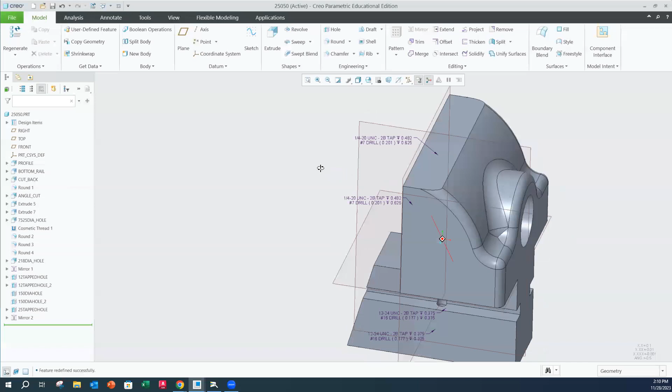Okay, let's go in. I call this the profile and I'm going to look at this extrusion. Here is what I came up with based on the dimensions that are there. After I got that all set, I'm going to show you how I extruded it, but I did it symmetrically about that front plane, on either side. So there's going to be an axis of symmetry down the center of this part.

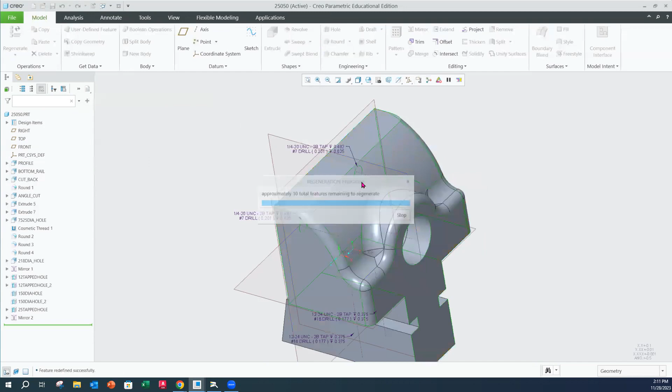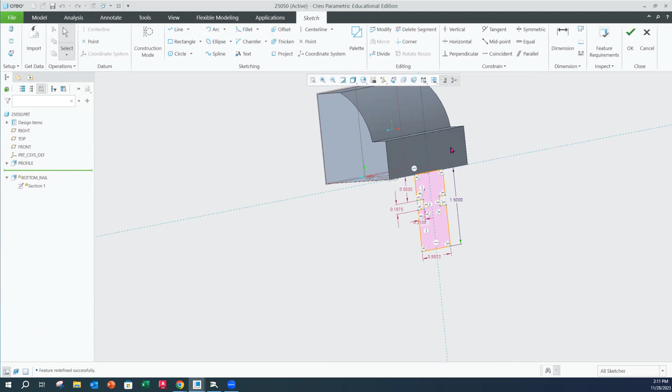Then what I did is I did the bottom rail next. When I talk about the bottom rail, that's this portion down here. So if I look there, my sketch came from the front side here. Now, when I look, it's actually on this surface right here of my original profile, that first extrusion that I created, and it's on this front plane right here.

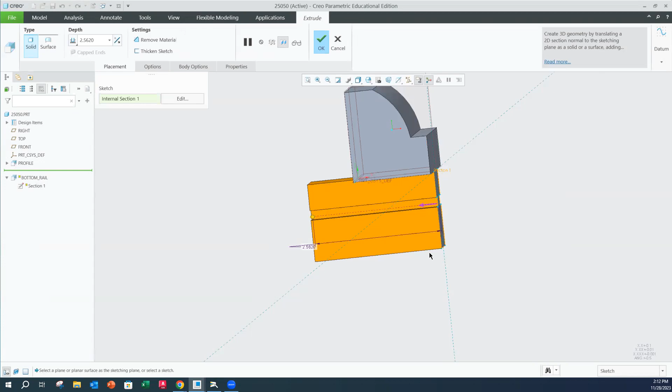And then I extruded this straight back. So if I go to definition there, I made it completely solid all the way back for the entire length of 2.562 inches, as given in the bottom dimension of that rail. Then I went in and I did a cut. The cut was taking out this portion right here. So if I look, I'm gonna grab this.

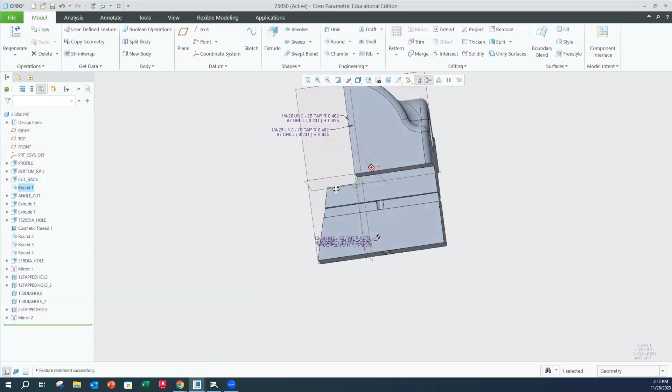This is taking out that little bit on that backside. Then you notice I added a round. This is a fillet that is created to the size given in the book or in the example. And then I grabbed the angle cut. So I'll show you, I sketched right here, along here using 3/8 of an inch dimension. And then I extruded that back as a remove material, or a cut.

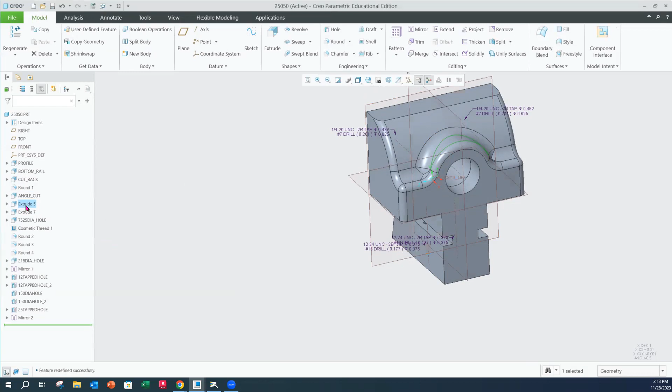Then the next thing that I did was I added the rounded portion here of the top extrude. I didn't call it anything, I didn't really know what to call it. So I'm gonna look here. You'll notice I just created a circle on that front face and I extruded it back into the part. And that was it, to make that thickness there.

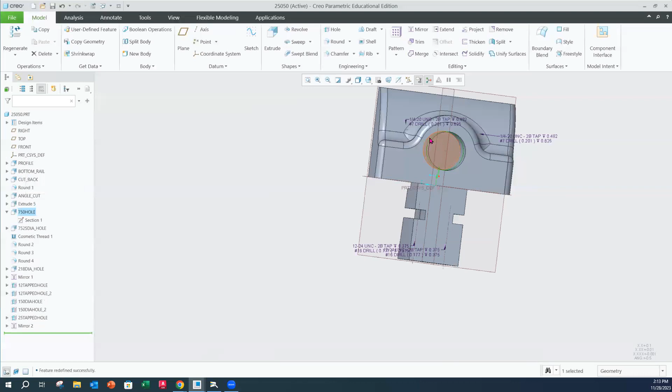Then you'll notice that the next thing that I did is I added the extrude, and this one is the 3/4 inch. I'm going to rename this one to be 750 hole. So this is the 3/4 inch hole going back. Let's go underneath. The diameter I'm speaking of is the top line of this call out.

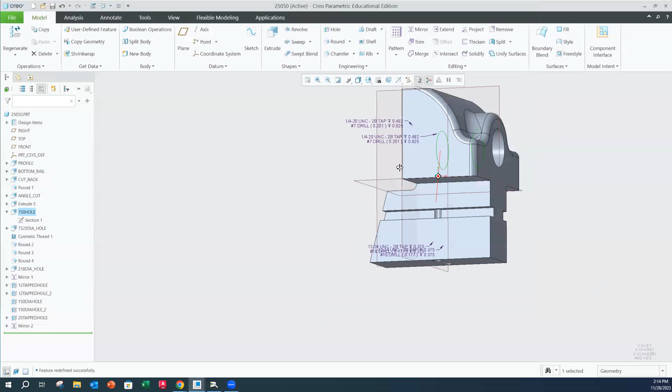So this is the one that's going back 1.087. I drew this actually, or I modeled it to 0.749 to be the middle dimension, so that when I do my tolerances later on, they're going to be plus or minus 0.001. And then I'll show the limits. So that's that hole, going all the way back. You can see it goes all the way back to this portion right here.

Then the next hole that I put in was the hole for the minor diameter of the threaded hole in the front here. So let's look back at that call out. That's going to be the front portion right here. So this is 0.812, that's 13/16-20 UN, which is Unified National Thread. Extra fine is the EF. B is that it's an internal, and then 3 is also the class of fit.

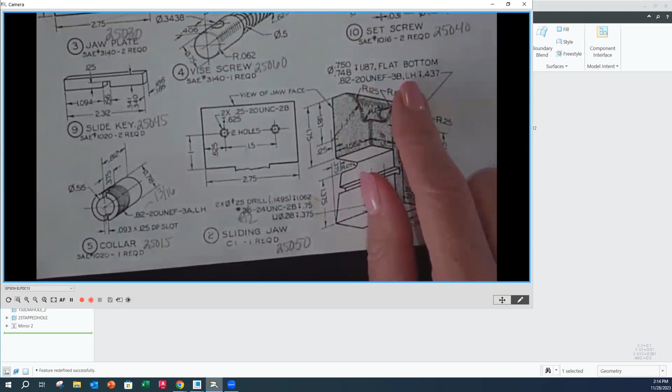So it's a closer class of fit, and it's left-handed, not right-handed. So we have to put LH on there for a left-handed thread, and its depth is 0.437.

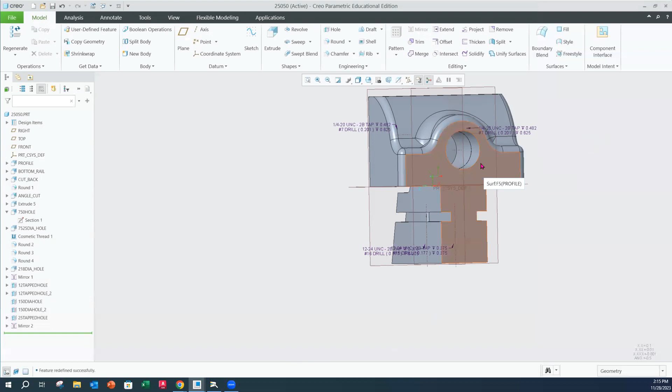That hole I modeled to the minor diameter of this thread. To get that minor diameter, I simply did a Google search, and it came up as 0.7525. So that's the size I actually modeled it at, sketched at 0.7525 - that's the minor diameter. I did that to a depth of 0.437. Now the cosmetic thread, let's see how we put that in.

I'm going to edit that definition, hit cosmetic thread under engineering. I selected that inner portion, and I wanted it to be a simple thread. The diameter is going to be 0.813, and it's going to be a pitch of 20. These numbers we just key in because that's the major diameter, and I want that to be the major diameter. So that's going to represent the threads being cut or tapped into when it's being generated.

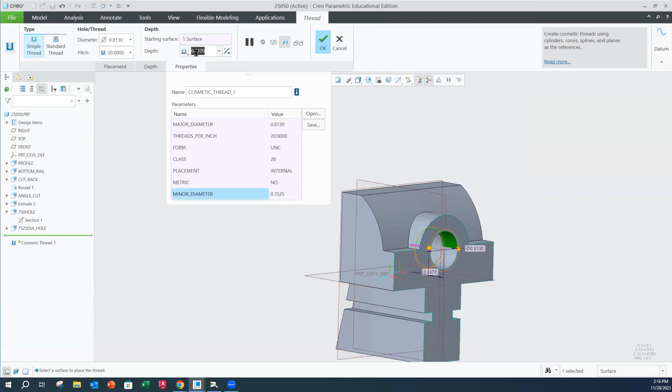Now I have to go over to properties. I need to make sure the major diameter is 0.8125 or 0.813, and the minor diameter you're going to key in is 0.7525. So these are the two numbers. Then you're simply going to have those in there and hit OK. But before you hit OK, double check your depth from the front surface - you have to select that front surface where you want it to start, and you want that to be at a depth of 0.437. Once all that information is in, you can click OK.

And now you're going to see the two diameters - they'll also reflect in the drawing now. All right, so that's how you create that.

Then you're going to notice I did a bunch of rounds - these are the 1/4 inch and 1/8 inch rounds around the outside. I'll let you play with that individually.

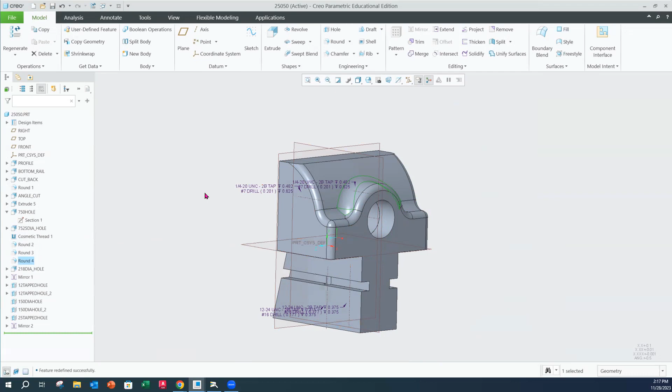Then what did I do on the next ones? The next hole, oh these are the ones on the bottom. This is the 0.218 hole, the first hole on the bottom right here. If we go back to our callout, you'll notice we have a counter bore of 0.218 - that's this one right here, that first one. So I modeled that one first.

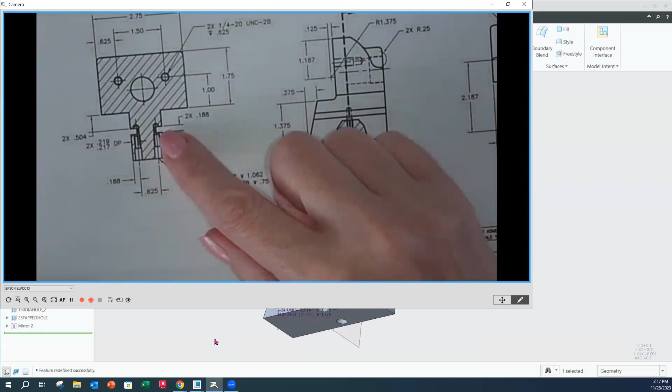Then I added the threads using the hole wizard - that's a number 12-24 UNC, at 3/4 inch deep from the bottom up. And then lastly is the diameter of 0.150 all the way from the bottom.

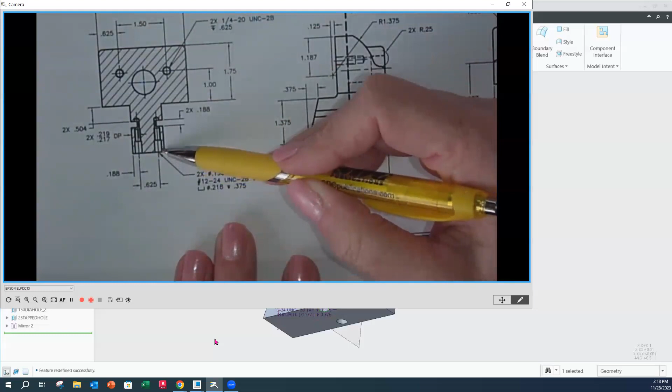Now a good idea is to model these in the order we see here. So do the diameter of 0.150 all the way to 1.062. Then do the threaded hole all the way to a depth of 3/4. So this one right here is going to be from the bottom all the way, 1.062. This one here, all the way from the bottom to the bottom of that tap, is going to be the 0.75. And then this last one is going to be to 0.375.

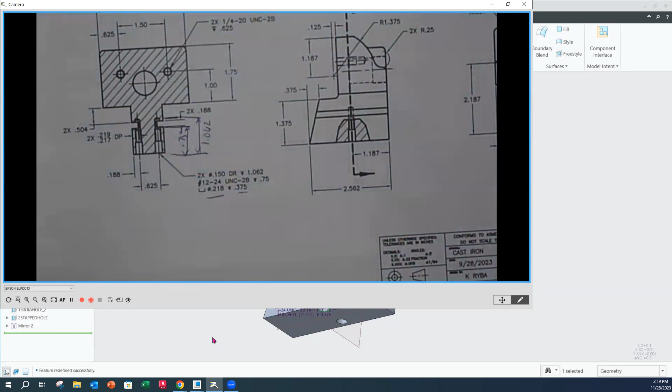Now once you have the three in here, you can then mirror them over, either selecting them all together or one at a time, and you can mirror them over that plane going down the middle from your original symmetrical extrude. So that's the order for doing those.

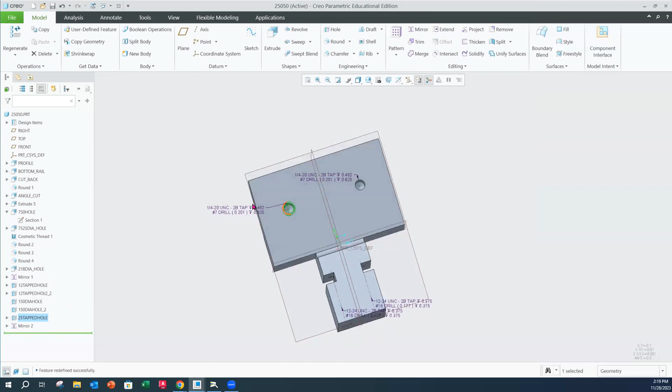Then if I go back over here, the last ones I have are the two tapped holes on this back face. This is a 1/4 inch tapped hole and it's 5/8 inch deep, or 0.625. I did one using the hole wizard right here on the model ribbon, and then I mirrored it over that front plane on the other side.

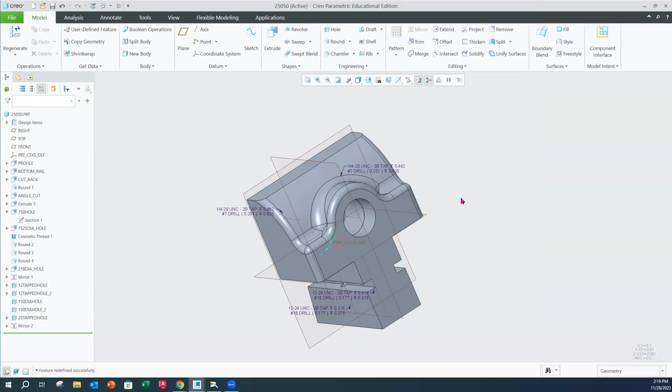So that's the process of creating this particular model. If you have any questions as you go through, just let me know, but that would be the process using the dimensions that are in here. When you do these holes coming up, you are going to see, by design, these little holes or grooves in there. That's how you know you did it correctly and have them placed correctly. All right, so that is the model.

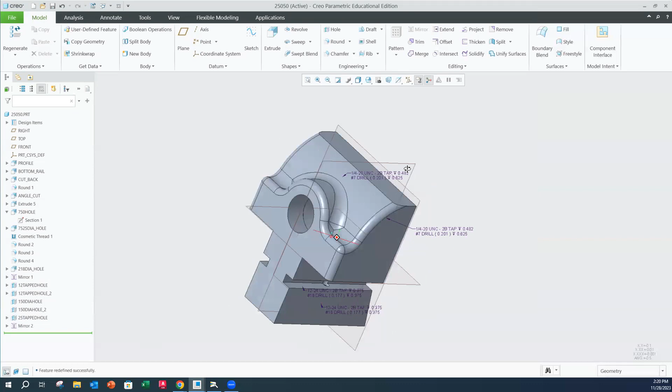We're now going to go over and we're going to be looking at the drawing. So what I'm going to do here is start with a new... actually, let me do a cancel real quick. I always like to do a quick save, and then manage and delete old versions. I just like to have a nice clean start before I start my drawing.

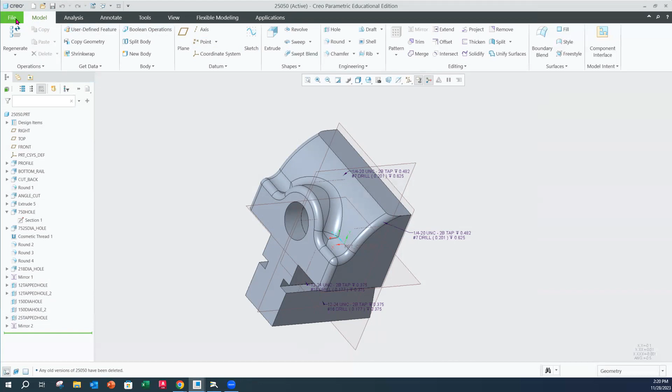I'm going to do new drawing, and this is going to use the model file name. Then I'm going to browse and use my B size WCTC. I'll hit OK. All right, material is going to be SAE...

Or am I mistaken on that? Nope, it's cast iron, I'm sorry. CI is cast iron. Cast iron, okay, KRB, and this is called the sliding jaw.

Now, I'm not going to take time on the video to do this, I'm going to do this in the background. I'm going to pause the video and delete all the dimensions that are on here, because this is a more complex model, and it's too much to go through. So I'm going to go feature by feature and show you how to get them in, and it'll be easier to manage. I'm going to pause my video right here and I'll be back with a cleaned up drawing.

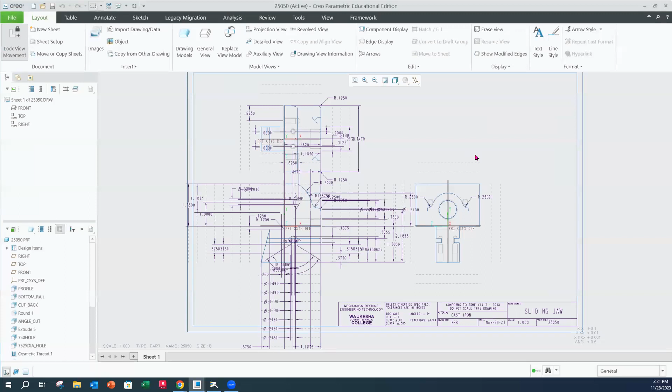Okay, now I've gotten rid of all of my dimensions. I'm going to go over to the annotate tab, and once I'm over here, I can now get rid of some of these extra lines that are in the middle. These are just guidelines so that when you place your dimensions, they're nice and even in between. They were added because of all the dimensions that were there. So I'm going to take a moment and get rid of these as well, except for the two that are closest to each one of the views. I'm going to pause again and take the time to do that, and I'll be right back.

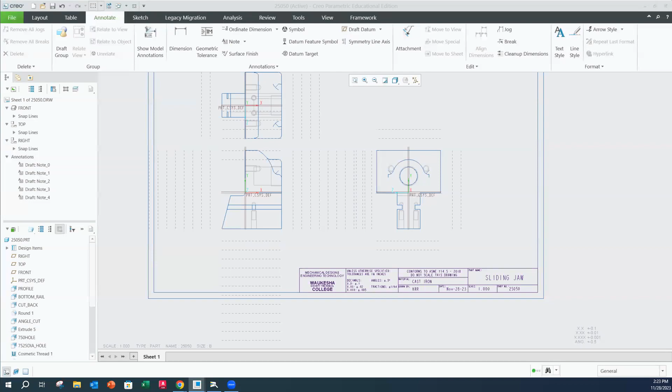Okay, so now I've got those taken care of. You'll notice that I did space out my views, and the size that we are at right now on this B-size board is at a 1 scale. You'll notice the scale is down here at the left-hand corner, at a 1-to-1 scale. I'm going to double click on that to change it to 0.75.

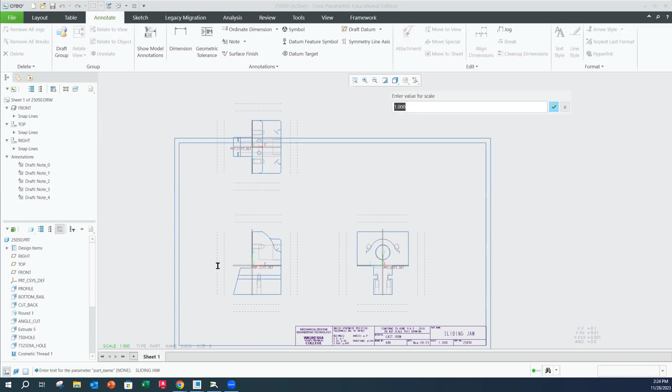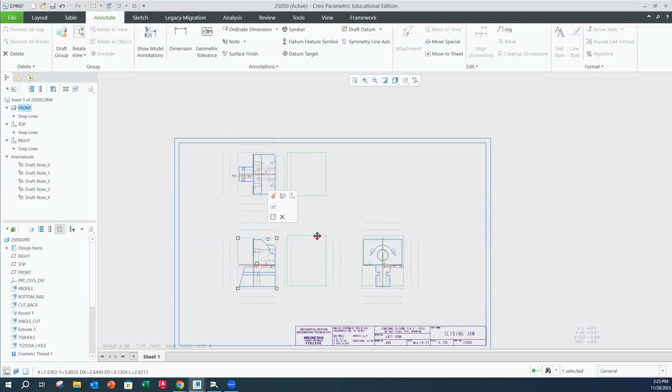And now what that allows me to do is I am going to be adding a section view over here, as we see on our guide. That'll allow me to put my views in a little bit nicer, so now I can bring this closer together. And we can scooch this view over, as well as that right side view, and kind of bring this one into the middle-ish.

The other thing that I like to do is sometimes the planes get a little crazy, so I'm going to turn all of these off just to have fewer lines to look at. And I'm going to do a quick save at this point on this drawing.

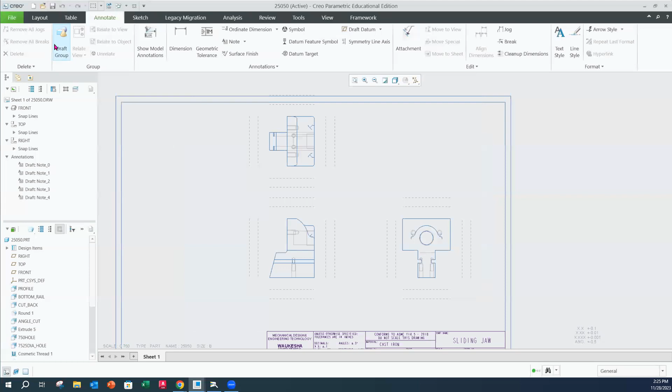Now I need to create my section view over here, but before I can create it as a section, there has to be a view there. So the next thing I'm going to do is go back to my layout view and create a projection view. Click on that, left click my front view, then go over to the left and left click again, and it's going to place that view. Right now it's a projection looking at the part, so it's a left side view, if you would. And then I'm going to reselect it.

I'm going to edit this, and go to view display, and I want it to be no hidden because it's going to be a section view. And I also do not want to show any tangent edges. Okay, apply. Then I want to go to sections.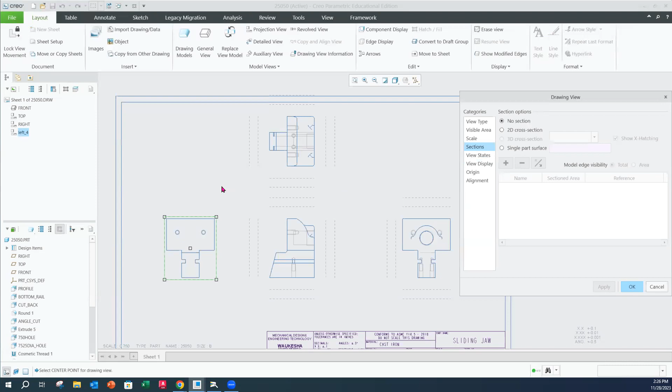Now to place my section, I actually want it to go all the way through the very middle of this fastener, because I want to be able to show those over here so I can dimension them and also call them out. At this point, I can't go any further because I need a plane to go through there.

So I'm going to hit OK here and go back to my model. I am going to create a plane that is going to go through those two holes. Now I'm going to go back to my drawing itself.

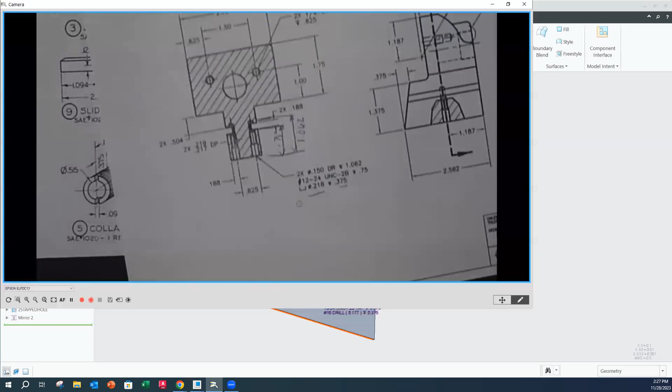Okay, and this is the guide. Where I want this to go through is right through the middle here. And then we're going to show that over on this side, the section view. So what that means is if I go to the top here, my entire width here is 1.562, so that takes me from this point right here all the way to this side.

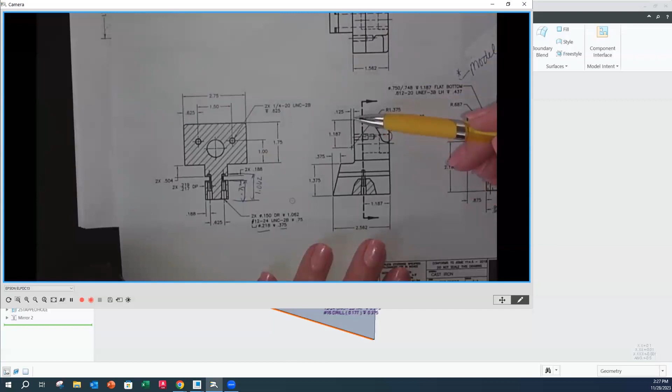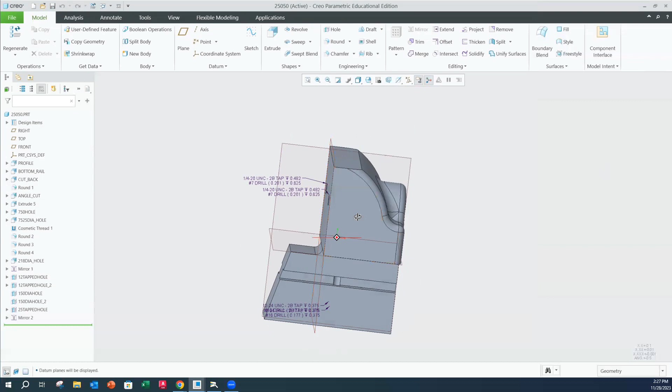We're going to notice that if we go back to our model and I turn on my planes, my right plane is right here, and it's on that face. So I'm going to do an offset into this so that it goes right through the middle right there.

So going back over to my drawing, I'm going to take this 1.562, and then subtract off 1.187, and that's going to be 0.375. So the distance from here, where that plane is, to here is 0.375.

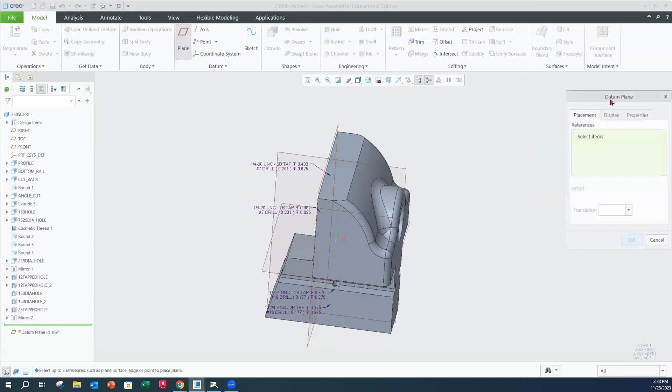So I'm going to go back over here and create a plane, offset from this right plane right here. So I'm going to do a plane, and it's going to say you want to select references. So the reference that I want is going to be this plane right here, the right plane. And then it's going to ask me, do you want to offset it, do you want to translate it?

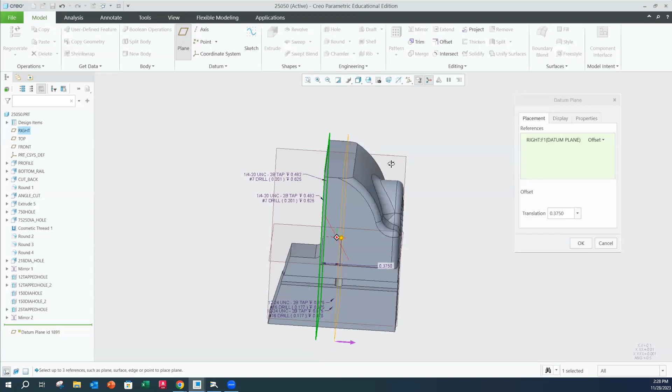Translation is what is the distance that you want to offset this for. And I want it to be 0.375, enter. And then we're going to look, okay, from the green, which is my reference, to the yellow, that is in the correct direction, this is going to be 0.375. I'm going to say okay, that looks good. And it just created a datum plane down here, DTM1 in my tree.

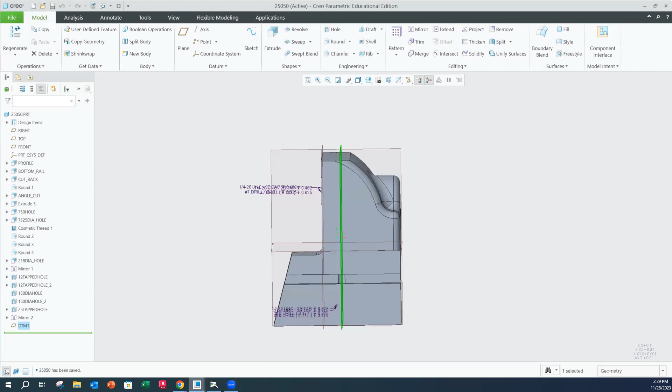And I want to do a regenerate and a save on that. I'm going to go over to my drawing. Now we're going to notice my planes are on here, and notice now I have a plane running right through here. And at the bottom of my design tree, look at that, there's that datum plane. That's going to be the plane that I select when I do my section, and it's going to go through the place that I need it to be.

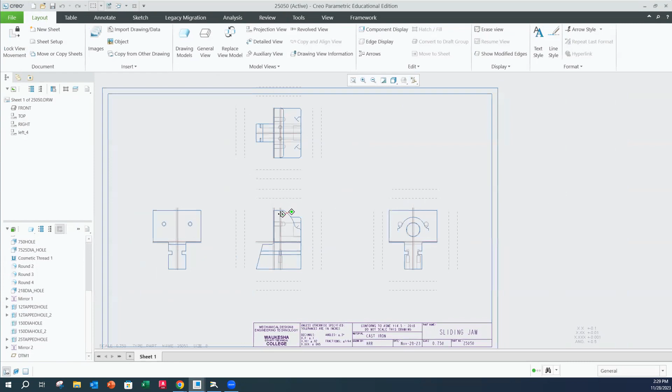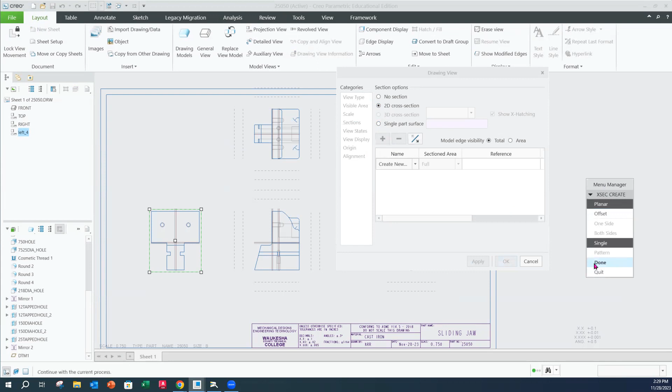So now I'm going to go back and go into that view, and I'm going to create my section. So I'm going to go to sections, 2D cross section, plus — this little menu manager comes up — I want a planar single, done. And then I'm going to call this A, because it's the first one on here.

And now I just have to select my plane. I can select it here, or I like to be safe — I know that it's called DTM1 down here, so I'm going to select it right there. Now you'll notice that A right away is a green check mark. It's a full section, which is exactly what I want to do. I want to go through the entire section here, and I'm going to say apply, and I'm going to have to fix my hatching, but it looks exactly the way I need it to look.

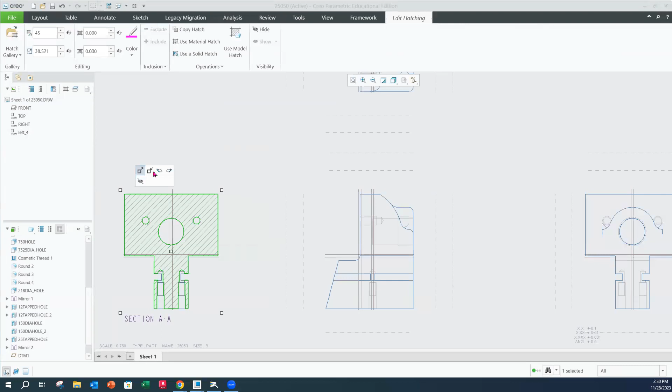So now I'm going to click off of that view, and then hover over and select that with my left mouse button. And I'm going to increase this in increments until I like the way it looks. I think that looks pretty good. So now I have that cross hatching in there, and that's all set.

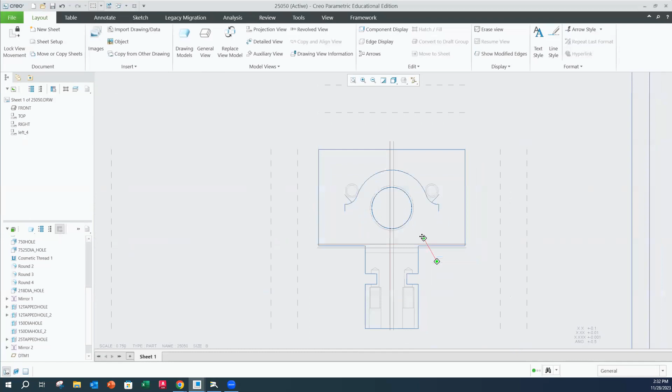Okay, now we need to work on these views and the lines that are here. We're going to look at this view first. You're going to notice there's a bunch of lines missing. It almost looks like it's not connected. But what's happening is, as we look at our model, all of these edges are rounded, and in the view we have it set so that none of the tangent edges show.

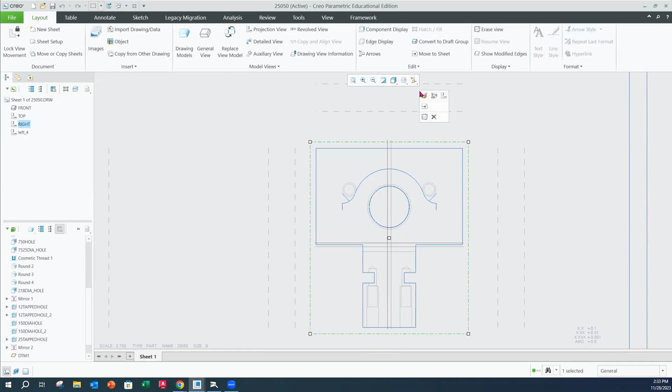Okay, so let's go back to Creo. We're going to click on this view and turn them on to see how that looks. So we're going to go to view display, and we're going to select hidden because we want the hidden lines showing. Then we want to go to default, and then apply. What's going to happen is we're going to see all those tangent edges.

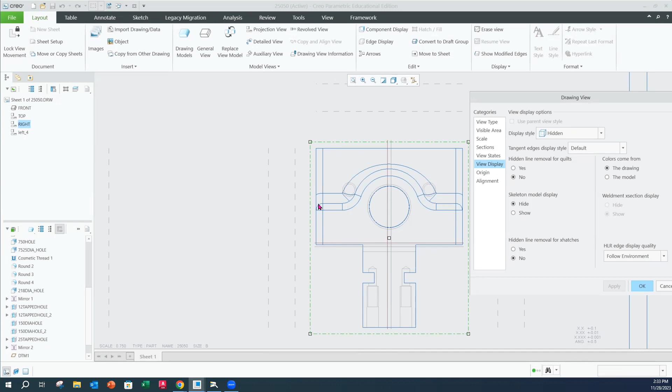Okay, still doesn't look good. There's like too many lines, especially as we look at it in this view. But we're going to leave those there for now, and we're going to singly select the ones that we want to get rid of. Now I'm going to leave that there. I'm going to compare this to our view right here, okay?

So what we need is we need to be able to dimension to that surface where this is tangent, kind of across here - it's just three quarters of an inch. So we have extra lines around here on our view that are going to reflect those radiuses that are there. So the ones that I want are the ones that are right in the middle here - these are the only ones that's going to be the very outside that I need.

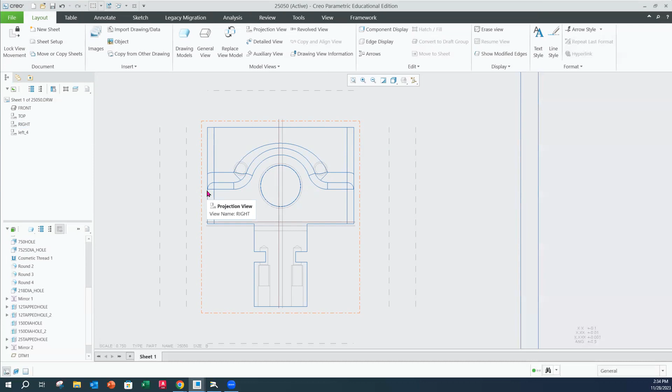Okay, now to get rid of those, I'm going to be on my layout tab right here, and I need to go to Edge Display. I'm going to click on Edge Display, and it's going to come up with this menu. What we want to select is Erase Line, because I'm going to select the lines that I want to get rid of. So I'm going to erase line, and now it's telling me to select them.

Now I'm going to select my first one, and then I'm going to hold the control key and continue to select the ones I want to get rid of. So I'm going to select my first one here at the bottom, hold the control key, and continue selecting: this vertical goes, this one goes, that one, that one, that one, this one, and this one. Now I'm going to stop here. Oh, and I want to get rid of that front one too. I just want to kind of stop here, get rid of that one.

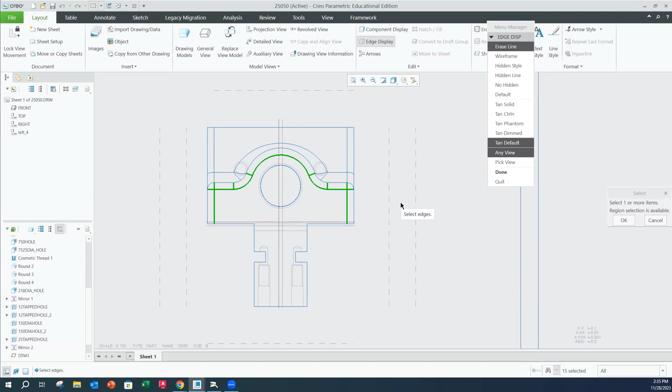Now, don't hit done, don't hit your middle mouse button - you want to hit enter. Okay, enter, and now they go away. I know, if you hit done or hit the middle mouse button, nothing's going to happen. I tried this a couple times, and so you have to hit the enter key at the end of that.

So now we've got that profile there. We want to get rid of the rest of these lines that are above that - not the circle ones, just the ones that are these tangent lines. So I'm going to hit Edge Display again, erase line.

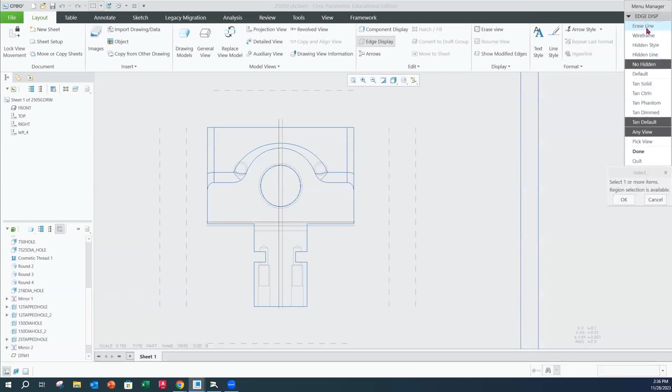And now I'm going to select my first one, and get closer here. I'm going to depress and hold the control key - this one, that one, that one. So when they get orange, you can left click and highlight it. And then I'm going to do the same thing on this side - that's one, that one, this one, and that one.

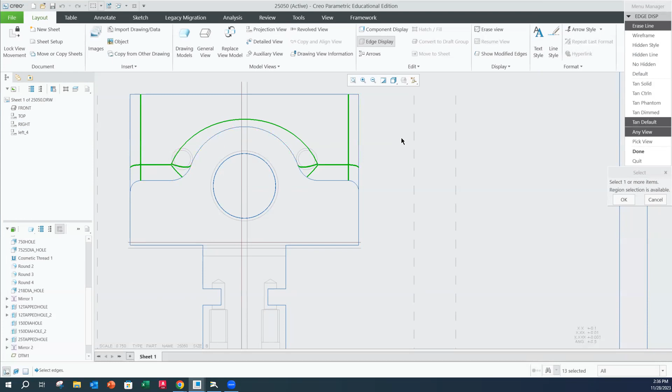And then again, I'm not hitting done, I'm not hitting my middle mouse button. I'm going to press the enter key, and they're gone. Okay, I know, it's kind of crazy.

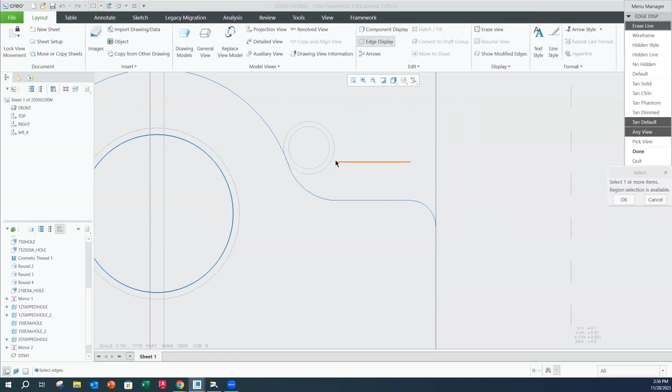Oh look, there's a little line in there I missed. See it? Okay, I'm going to do that one more time. Edge Display, erase. I'm going to grab that line right there. That one right there, I got to zoom in. There we go, one, and then I'll go over to this one. Control, hold that, and then enter to get rid of it.

All right, now they're there in the background. Let's say you deleted something you didn't want to get rid of. You're like, oh crap, how do I get it back? You go back to Edge Display, go to Tangent Solid, and go over the top, and you'll see these flash in the background. Once you see the one you want back, simply select it, hit enter, and it's back.

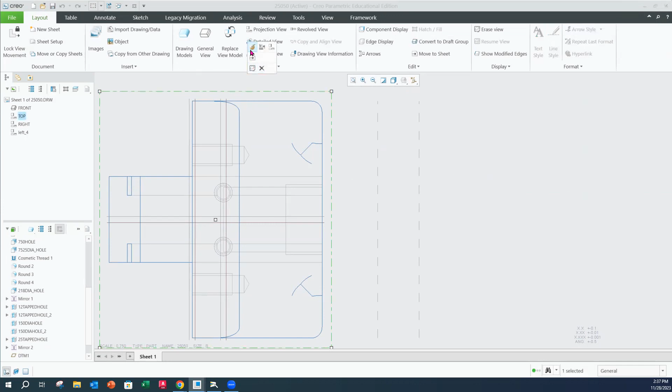Okay, now I'm going to get rid of it. Edge Display, erase line, select it, enter key. Okay, so that's this view, and this looks good. Now I'm going to go up to the top view, and I need to do the very same thing up here. I need to first add those tangent edges back in, and then delete the ones I don't want. So, View Display, Default, or show tangent edges. I'm going to hit OK. And there we go, all right, they're in here.

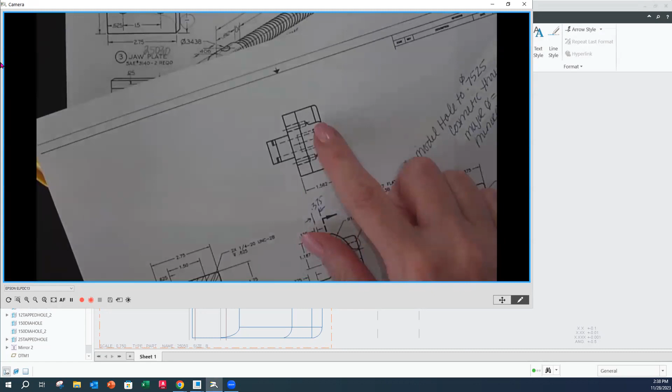Now, the ones that I want, we're going to compare back here. This was done in AutoCAD, and it was extended a little further back, but I want to keep these. I want to keep this front one, but get rid of anything else that's not there. So let's see what we've got.

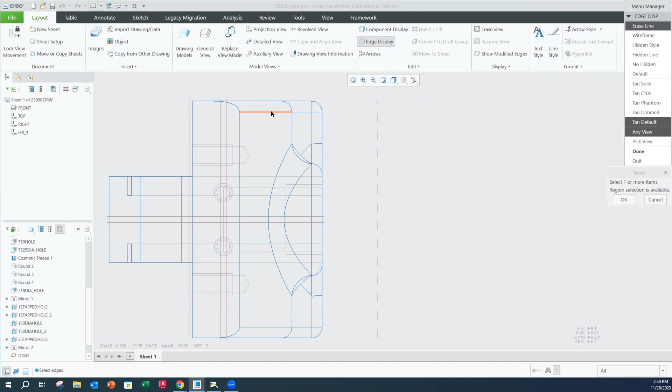So Edge Display, erase, and we'll take this a little at a time. I definitely want to get rid of this one, holding my control key, this one, that. Oh no, wait. This is going to be this. Want that one. Oh crap, I think I want that one. There we go, so you can just toggle them on and off. And then, you know what, it's always better I think to do fewer, because that way you can always add them back in if you need to. Get rid of this, and that.

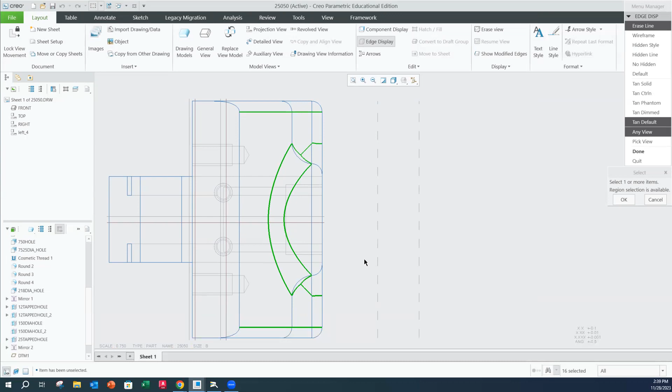And now remember, don't hit done, don't hit your middle mouse button, hit the enter key. And I want to get rid of this part in the middle. So I need to go to Edge Display, Erase, and I'm going to select that line right there and enter.

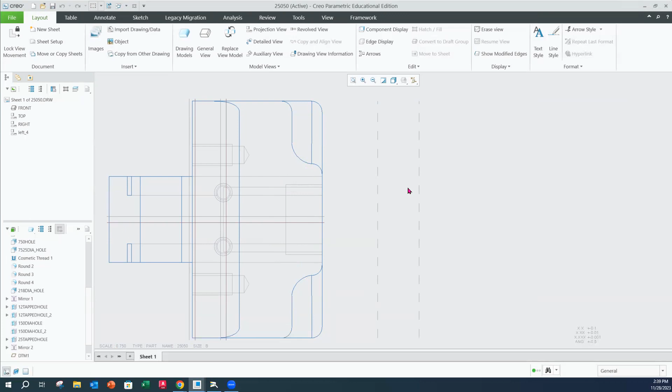I think so, I think I look good. All right. Yeah, so I think that looks pretty good. It's not exactly the way it is in the AutoCAD one, but these are the edges available to us. So that completes the front. Okay, so I'm going to do a quick file save, and that's how you can clean up those views.

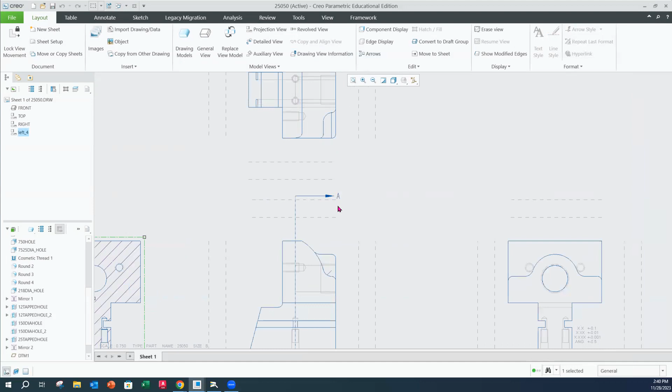Now, the next thing I'm going to do is get rid of all of my planes here. And then it's a matter of adding my, oh, I got to add my arrows. I almost forgot that, let's add our arrows in. So we're going to be on the layout tab, click on that view, go to arrows, and then click on the view that you want the arrows to be in, and it places it for us. And then remember, you can select those and move them so that they're out of the way of dimensions as you create them. So this can be moved around. Oopsie. Okay, so you can play around with that.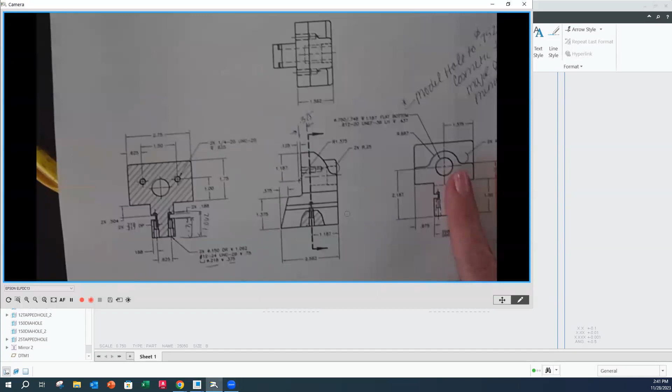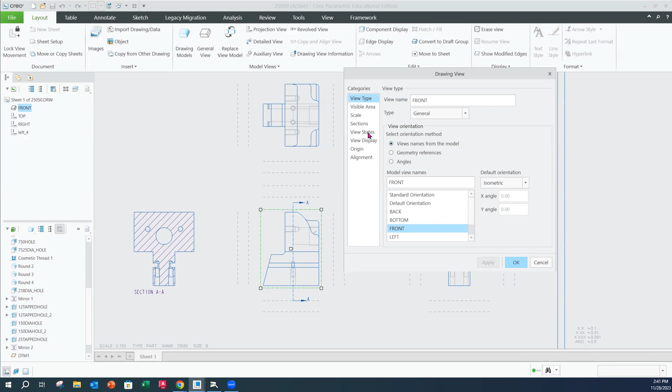You'll notice that on that drawing, in order to dimension to the location of that hole, we have to do a local section, okay? So if we go underneath here, we're going to select this view, and we're going to add a little section in there, okay? So we're going to say Section 2D, and we need to create new, we're going to call this one B. And plane, and I think I can just do this would be about the front plane. Right.

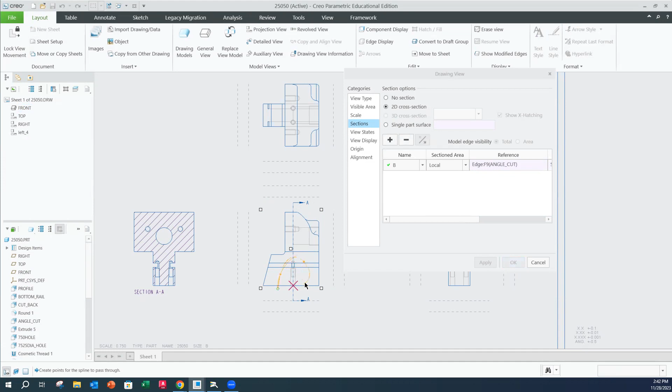Here we go. Now I don't want it to be a full section, I want it to be a local section. So I want to pick the point right about there. And then I'm going to do my spline around the outside. Here we go. Apply.

Oh, I know why, because it's on the front plane. So what it's doing right now is it's creating about the front plane, which is in the middle here, but I need it offset from that. So guess what I get to do? I am going to hit OK.

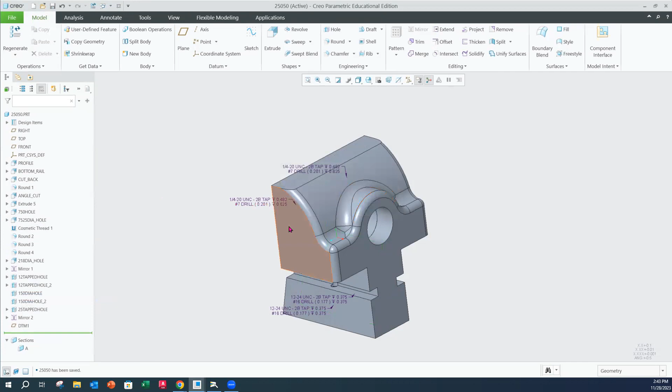And we are simply going to go back to our model. See, these are the fun things. We're gonna go back to our model. I'm gonna get rid of the B section. So I want to left click it and delete it. Okay, and now I need to create a plane

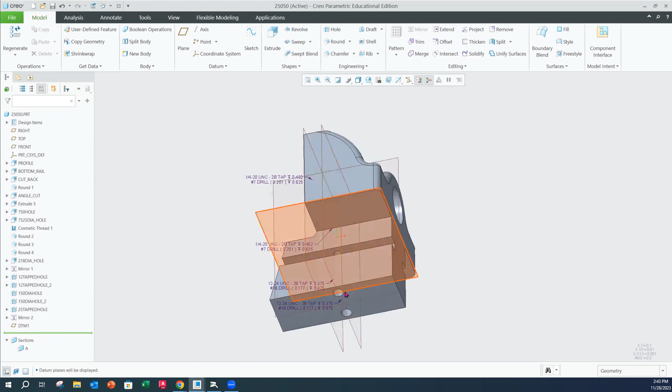through here, offset from my front plane. So I know that my front plane is going right through the middle here, and I want a plane that's going to go through this section here. Now, when I'm in this view, that means I want it through this hole right here.

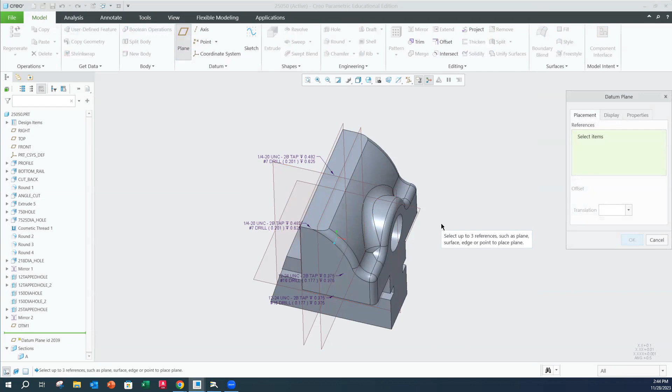And we are going to create a new plane. We're going to add a plane. And from the center though, from the center, back over here. So if this is 0.625 between there, from the actual center, it's going to be half of that. So half of 5/8 is going to be 5/16, which is

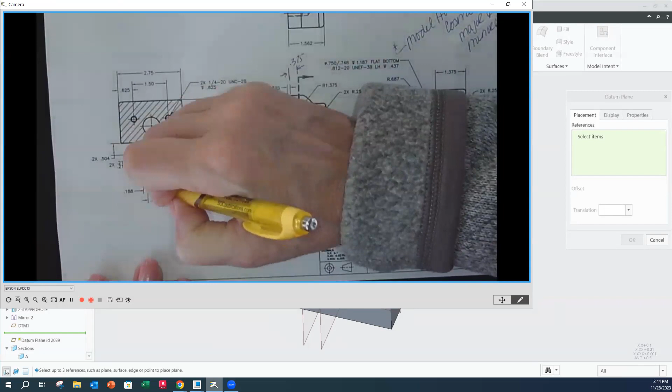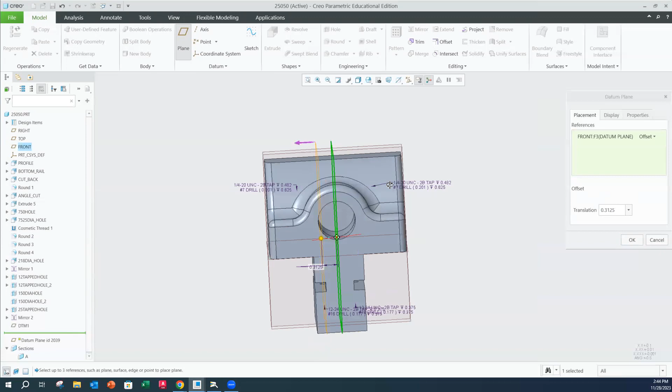0.3125. So from here, which is our front plane, to here is 0.3125. So I'm going to go back over here. I'm going to create a plane. I'm going to reference my front plane, which is right here, and I'm going to offset 0.3125, half of 5/8, right? Okay, and I want it to go, yep, in that direction. That's exactly where I want it.

I'm going to say okay, so now I've got datum 2, which is going to be the plane that I'm going to use for my local section. So we're going to go back and we're going to recreate that section.

So notice that it's gone, which is good. And we're gonna go down here, we're gonna grab this view, we're gonna add a local section. So we're gonna go to sections, 2D plus create new.

We want planar, single, done. We're gonna call it B. Make sure you would have deleted it before, otherwise you got to go to C. And then now we want to pick that plane. That plane is datum 2.

It's happy, but we want this to be a local section, which is going to be one of these cutouts. So the center of it, it's going to say, where is the center of that breakout? So it's going to be right here. And then now I'm going to put my spline around so I can see the whole thing. There we go.

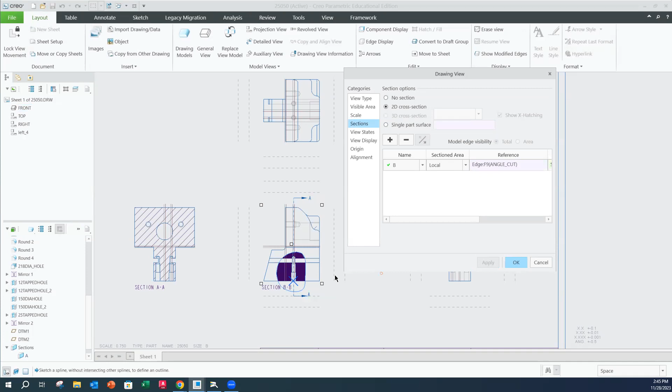And then I can say apply. Look at that. And then okay. And okay, there we go, because it's going through this plane right down there.

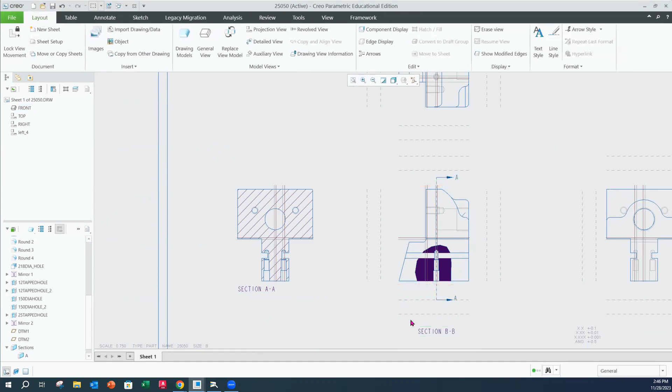Cool, cool. All right, so now what I can do is I can add the dimensions that are there because, see, come on, there we go. Let's put this down here, section BB. And actually, you don't even need to label it because it's a section in and of itself. You can click on this and make this wider so that you can see it. So that's creating that section there.

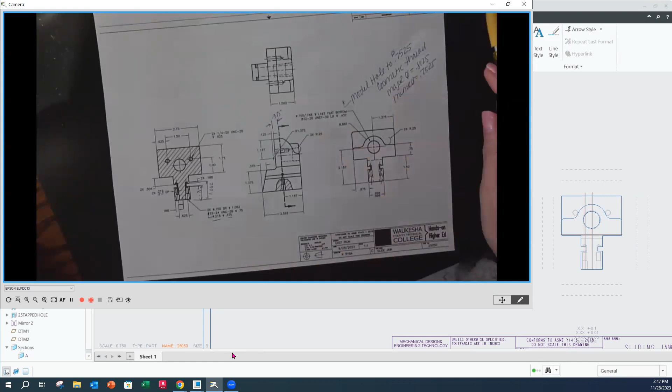Now I'm kind of looking to see if there's anything else that is unique here. You're going to create the note, you're going to attach the note here. I really don't see anything else. You've got your tolerances that you're going to be using. So I believe I have everything covered here in terms of the drawing and the model in order to make this mimic what's here. So I'll let you finish up putting dimensions on, okay?

But this hopefully you found helpful in getting your views cleaned up, the planes in order, and getting the section views and the local section view so that it's going to have the ability to dimension to those lines that are not hidden. Okay, so that's where I'm going to end. If you have any other additional questions, please let me know.